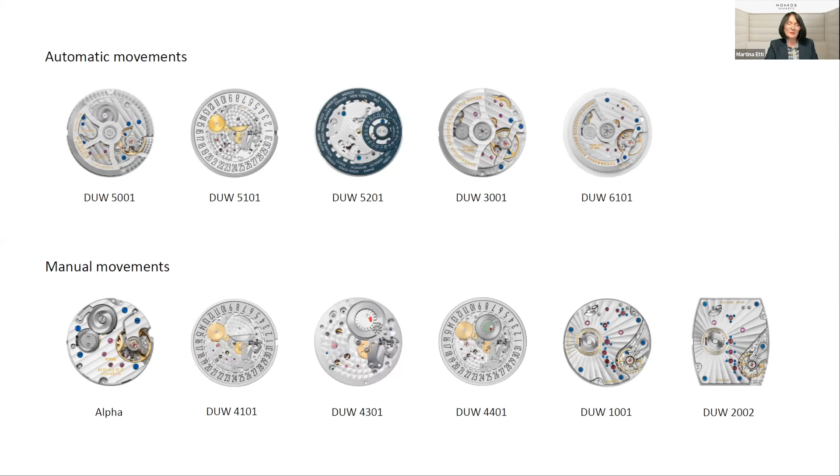Yeah, considering that contemporary luxury watchmaking in Glashütte could only start after the fall of the Berlin Wall in 1990, the row of 11 in-house calibers, as you see them here, makes us a bit proud. It all began with the lineup of 4 models, simplistic and elegant, with a classic hand-wound movement. By the way, the very first watches that came into the market from Glashütte after the German reunification.

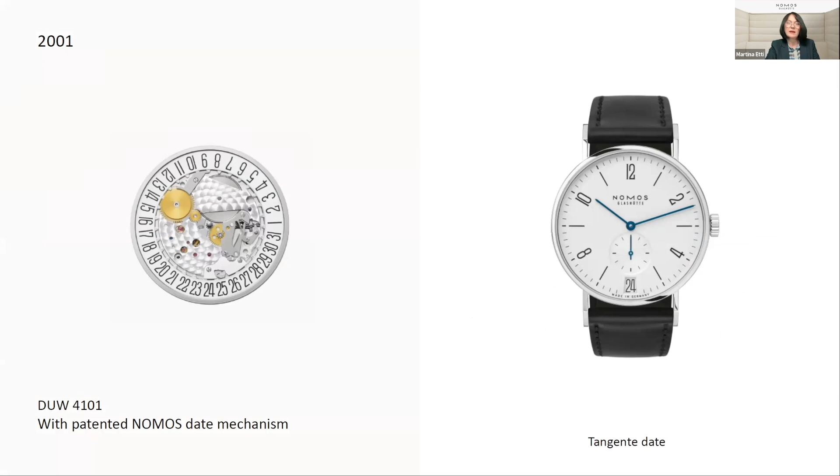For many years, everything the watches earned was invested in the step-by-step development of a full in-house movement. This is why in 2001, the first Nomos watches with date could be equipped with an in-house developed patented date mechanism, constructed in a way that kept the watch as slim as without date. The same applies for the patented construction of Nomos' very special power reserve indicator, introduced in 2003, constructed directly on the core barrel.

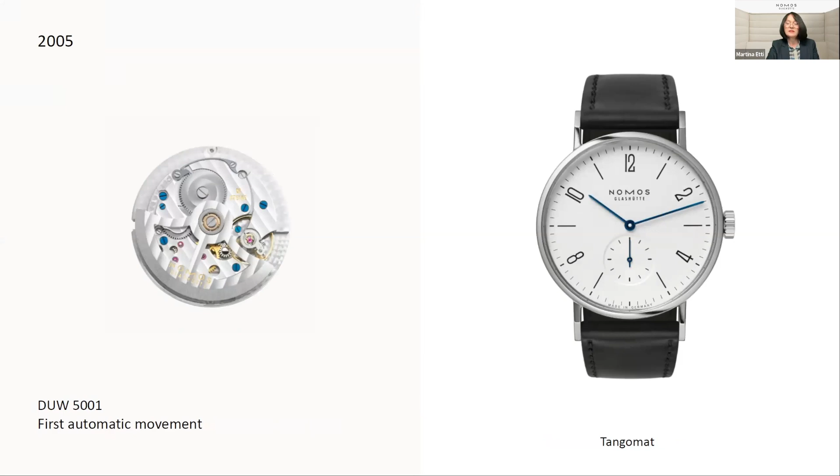The increased know-how over the years enabled the young manufacturer to present its first automatic movement in 2005, and a GMT caliber based on this in 2010. This complication rounded out our collection on the side of larger watches around 40 millimeters, like Zurich on the right side. 4 years later, another milestone for Nomos independence made big waves in the industry.

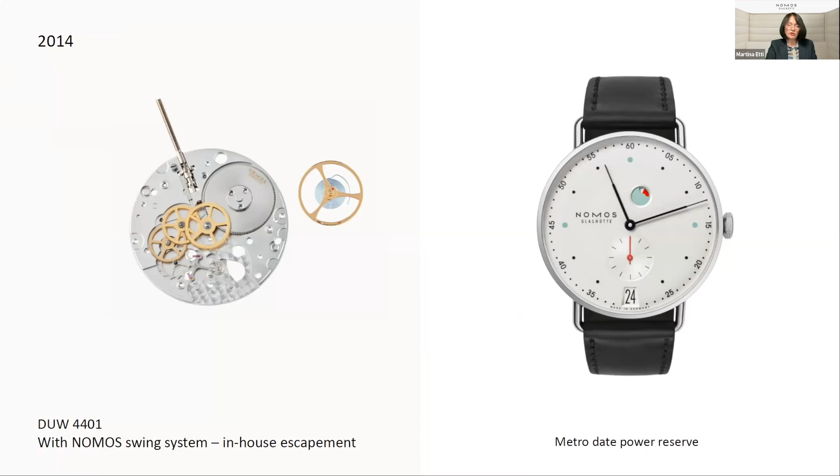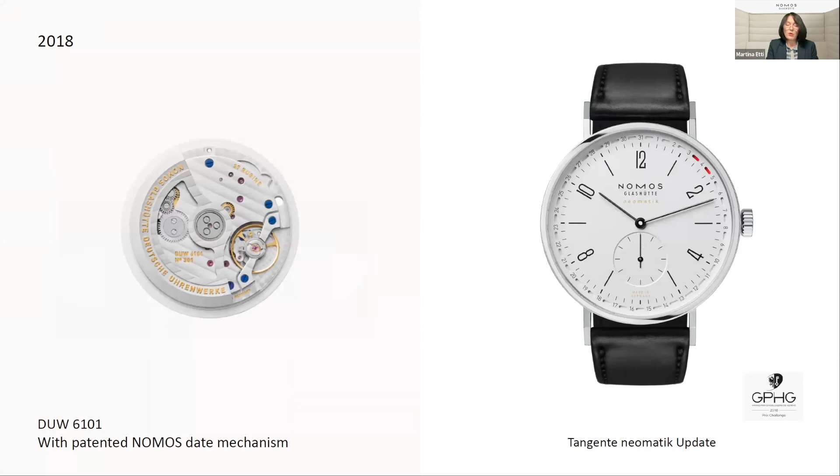The next big goal to develop the Nomos collection further was a slim automatic movement to equip our elegant hand-wound models with a self-winding motor. These slim automatic movements came with their own category, Neomatic, and my colleague Theodor will now report much more competently on these last 2 developments. Theo? Thank you, Martina. Thank you, Nick.

Today, I would like to show you the latest developments of Nomos Glashütte. And let's start with the screen sharing. Okay. I'm going to talk about our latest Neomatic movements, DUW 3001 and DUW 6101. 2 movements of the next generation. How was it possible that they could be so thin? We will talk about the 2 major designs.

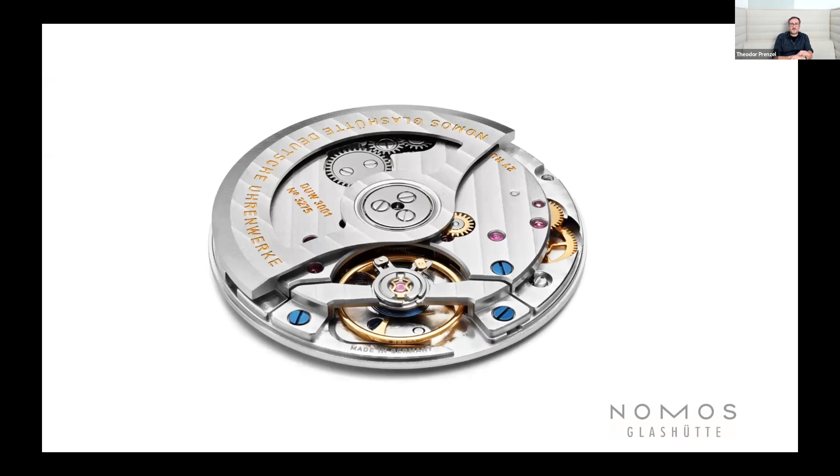Namely, DUW 3001, an automatic movement with automatic winding and the possibility of hand winding, of course. Just have a look at this. I think a quite beautiful movement and a typical Glashütte movement, also a typical Nomos movement. But what makes a typical Glashütte or Nomos movement? Basically, the design. Instead of two bridges, the barrel and the gear train bridge, we have what we call the 3/4 plate. 3/4, obviously, because it's not a full plate. It covers 3/4 of the movement, and it makes the movement very, very stable.

Also, we are able to produce the movement in high amounts. So it's very cost efficient, and we don't have to leave the normal price range. So what is so special about it? I can tell you, it's the height, or should I say the thinness. Maybe it's not the thinnest movement in the world, but it's one of them. It has a height of only 3.2 millimeters.

So let's give you a few key facts. Let's start with the name, DUW 3001. DUW standing for German Watch Manufacturer, in German, Deutsche Uhrenwerke. This is the label under which Nomos produces and of course sells and uses the movements. We have a diameter of 28.8 millimeters, and these are 12 3/4 Parisian lines. We have 27 jewels, and all in all 157 parts.

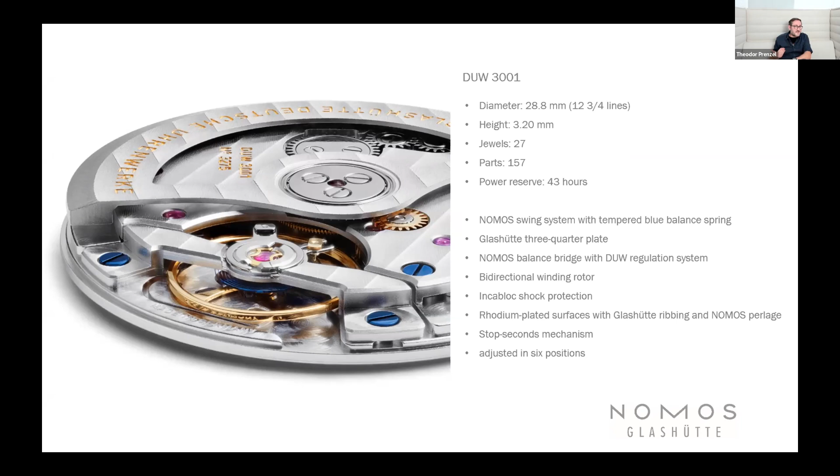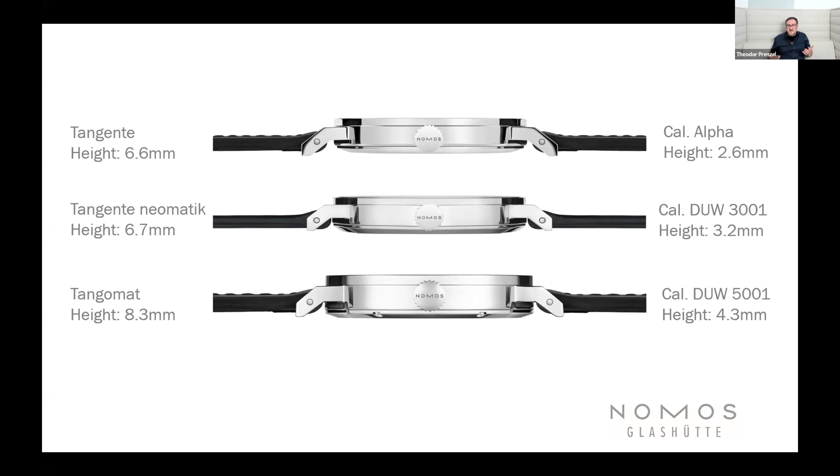This is the new Tangente Neomatik 3001, and you can see how thin it is. It's an automatic watch. It's a bidirectional winding watch with a height of 6.7 millimeters. So there's just the difference between the hand winding case to the automatic case of only 0.1 millimeter. That's really nothing. So the question is, how was this possible?

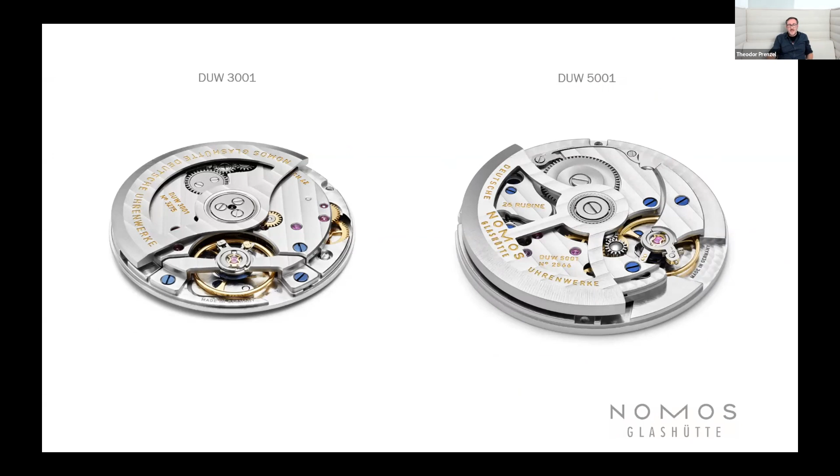The first design principle is the layout of the movement. At the left-hand side here, we have the 3001 movement, the new, the thin movement, the latest development. And on the right side, there is DUW 5001, as shown before in model Tangomat. It's a classical movement. At the first view, they look the same, but the differences are in the detail. So what we will do next, we will assemble both movements to see the different design layouts.

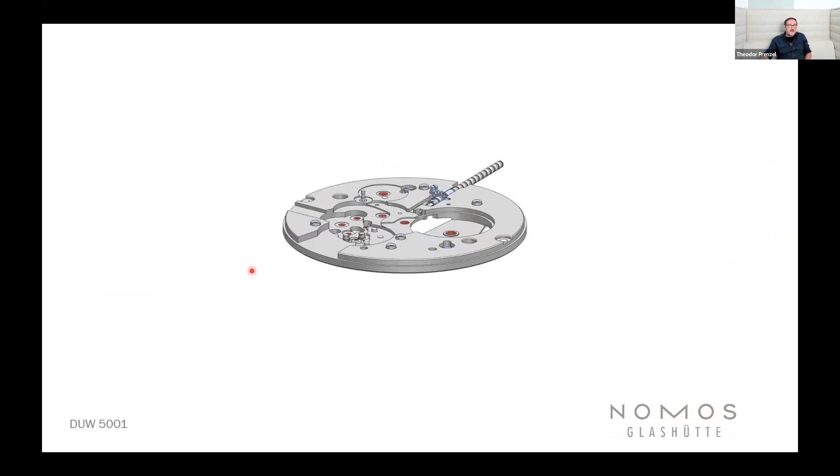Let's start with the classically built movement DUW 5001. Here we have the base plate, the main plate, and the stem here is already mounted, and there's no drivetrain, nothing, just a few jewels. In the next step, we are mounting the gear train here with the barrel, the gear train, the escape wheel, and the second stop lever, and after that our famous Glashütte 3/4 plate. And then we have the hand winding mechanism, which also needs to be included.

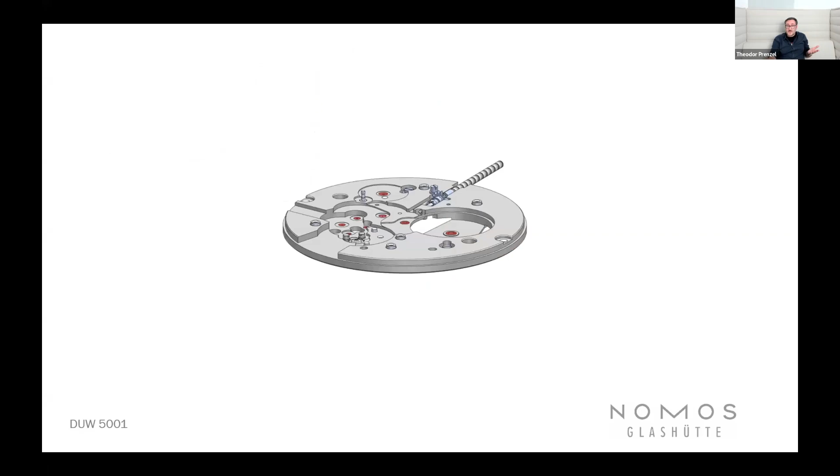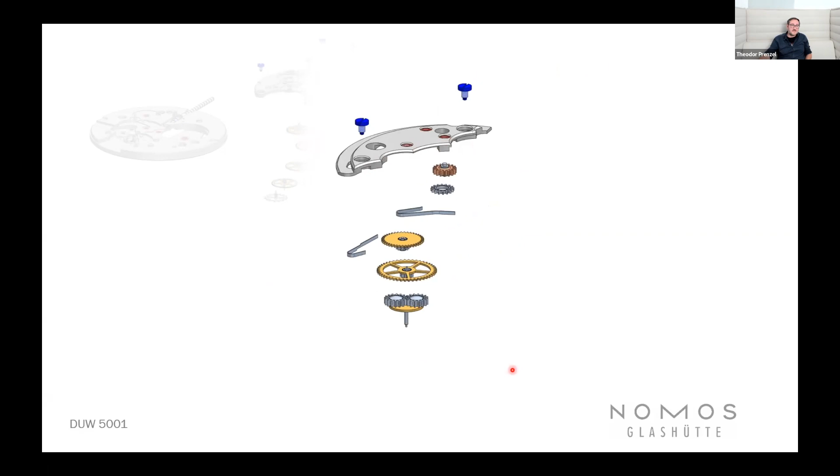Okay, so remember, we have the main plate, we have the gear train with the 3/4 plate, and we have the hand winding mechanism. And after that, we can now have basically the automatic winding mechanism to wind up the watch in an automatic way. And last but not least, we have the rotor, the weight which produces the energy for the mainspring inside of the barrel. Okay.

Here we can see all the parts in one slide. And this all has to be stacked on top of each other. And of course, this consumes a lot of height. It's a classical sandwich movement. Maybe you might be asking, why is Theo so crazy about the height, or Nomos, or the whole watch industry? Well, traditionally, the craftsmanship of a watchmaker is shown in miniaturization, making things smaller. For us, a thin watch is an elegant watch.

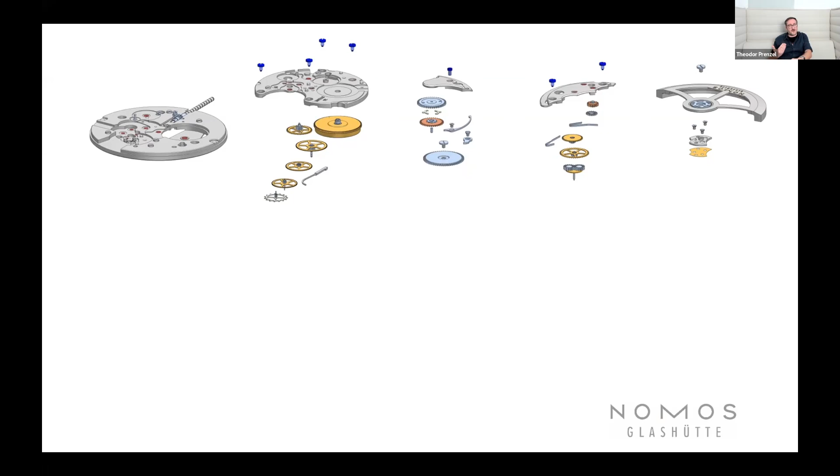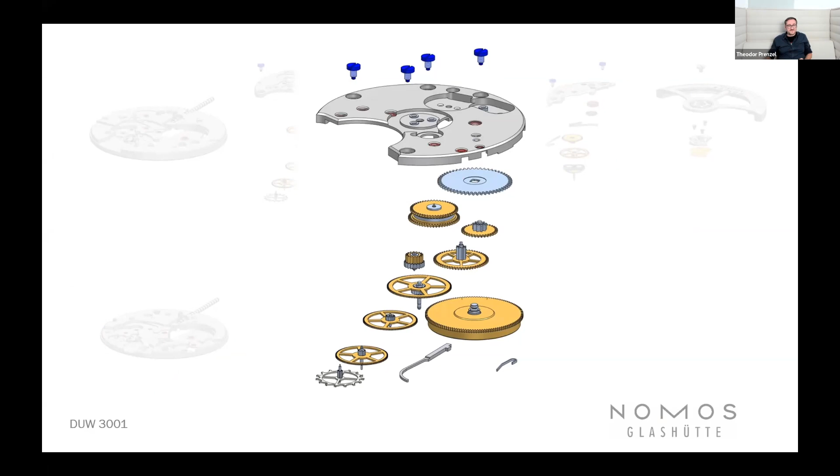And now let's have a look at the new movement DUW 3001. Again, in the first step, we have our main plate with the winding stem. And then basically we came up with the idea, why not integrate more parts than before between the two plates, between the main plate and the 3/4 plate. And we decided to put the drivetrain and also the automatic train between those two plates. And now only the rotor and some parts of the winding mechanism come on the top. And then we are finished.

This is now the result. We have half the number of sections, not the number of components, not the number of parts, no. We integrated two levels. You can see it here. In the top, we have 4 sections, 1, 2, 3, 4. And here in the bottom, we have only 2 sections, the main plate and the 3/4 plate. Also, we nearly halved the part tolerances and tested lots of different materials.

The ratchet wheel here, for example, which is in the new layout under the 3/4 plate, has to be very, very flat. And through the normal hardening process, such a thin part normally gets bent due to stress inside of the material. So we did lots of research, and now we use a special steel alloy with which the bending is within our small tolerances. So we halved the number of sections that had to be stacked on top of each other, and the result is a super slim movement that demonstrates the craftsmanship and allows for very, very thin watch cases.

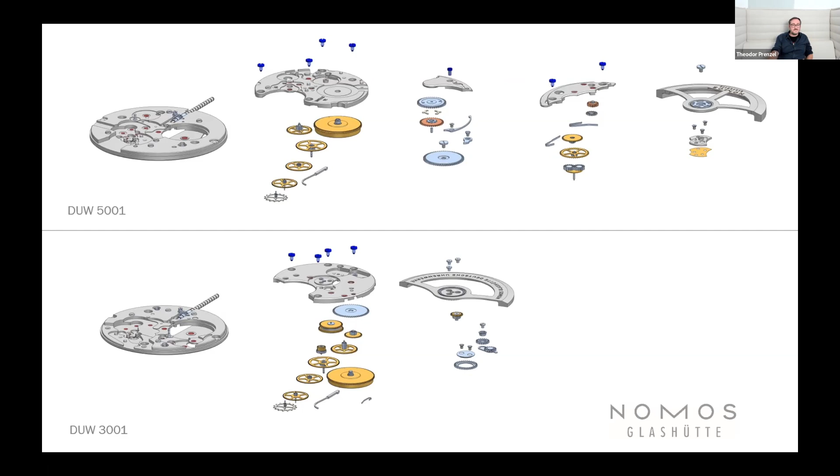Both movements, the 3001 and the 5001, are bidirectional winding. So no matter in which direction the rotor revolves, clockwise or counterclockwise, it doesn't matter. It produces energy in both directions. However, the mainspring inside of the barrel can wind up only in one direction. So a system is needed which converts this bidirectional winding into a monodirectional one.

In the 5001 movement, we used a so-called sliding gear assembly. Here on the top, you can see there are two wheels mounted. And depending on the direction of the rotor rotation, one of two wheels are meshed, and all of the wheels of the automatic train revolve in just one direction, and so does the winding of the mainspring.

In the 3001 movement, we had a completely different system. We used the so-called twin pawl winding wheel. We have two sections here, two gears, and in both sections there's a blocking mechanism. So this system is not an invention of Nomos.

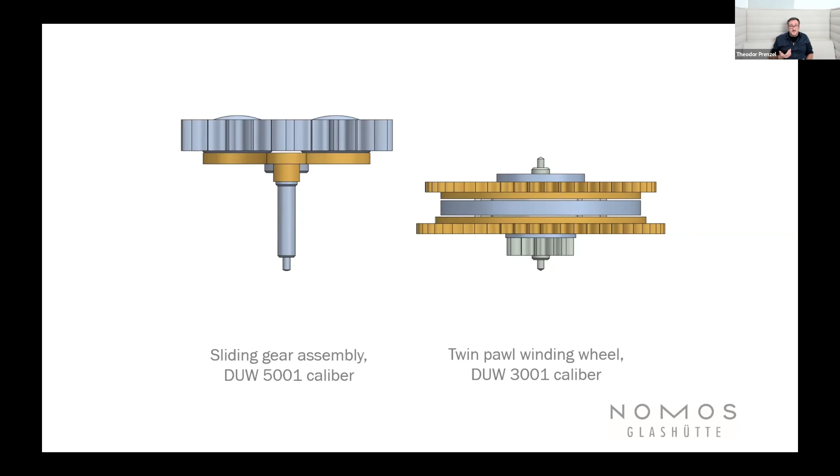Other brands use the system too, but for Nomos it's new that we produce and assemble nearly all parts of this twin pawl winding wheel by ourselves. The whole assembly consists of 12 single parts, and it's very difficult to mount because of the small part sizes. And the height of this complete system is just about 2 millimeters.

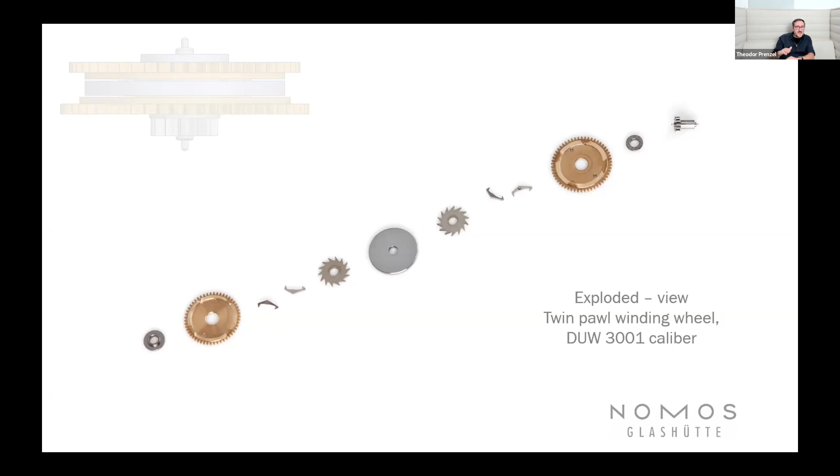Let's have a short summary. We talked a lot about the minimization of the height to make a watch thin. I hope I have been able to show how we put most parts between our main and 3/4 plate. Another big achievement is not about the size of the watch, but about the performance of the movement, the automatic winding mechanism. This system converts the motion of the arm, the motion of the watch, to energy, which is stored directly inside of the barrel mainspring.

So there are two things we keep in mind. The first one is, how big is the power reserve? How many hours can the watch run if it's not worn? And second, how often do we have to move our hand, and how quickly can the maximum power reserve be achieved?

Maybe you know this situation. People sit concentrated at their desk all day long without lots of motion. Often they wonder why the watch has stopped on their way home. Simple reason, there was not enough motion. The power reserve gets empty and the watch stops. And now let's walk through the chart here.

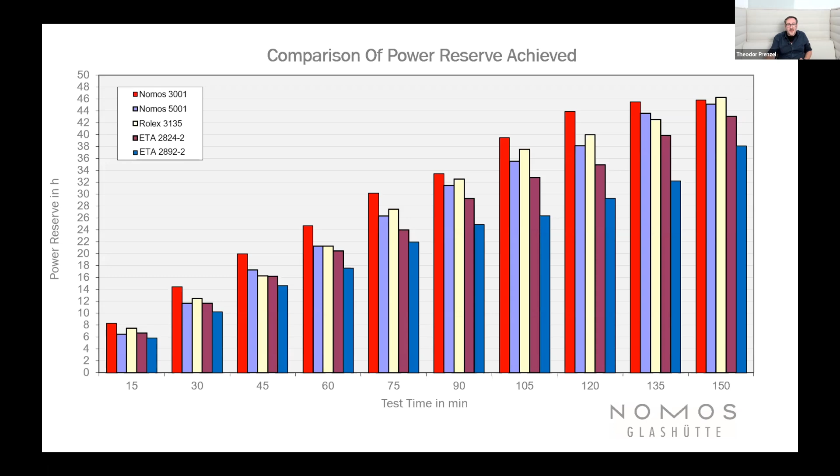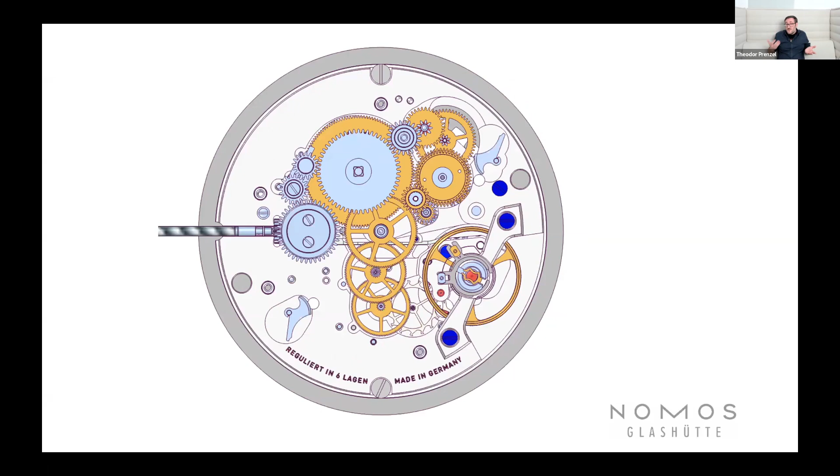The next step is the second biggest innovation. Our latest movement, DUW 6101, a movement with a date indication. If we remove the rotor and the 3/4 plate, we can look into the movement. And here in this CAD picture, you can see it too. Nearly all parts are mounted again between the main plate and the 3/4 plate. So it's a movement of the newest generation too.

I already said it's a date movement. And of course, I think the most impressive part is the date disk. It carries the numbers from 1 to 31; every day of a month has its own number. And in the movement, we have here a section for the quickset function. And on the left side here, there's the section for the date change during midnight. But before that, I'll give you some key facts of the movement.

We have a diameter of 32 millimeters of the main plate. But what you can see, the date disk here from the other side is much wider than the main plate. So if we include the date ring, we have a diameter of 35.2 millimeters, and these are 15.5 Parisian lines. The height with 3.6 millimeters is again this very, very thin movement.

We have again 27 jewels and all in all 188 parts. The power reserve is about 42 hours, 1 hour shorter than the 3001 because the date function needs some more energy. So the power reserve is 42 hours.

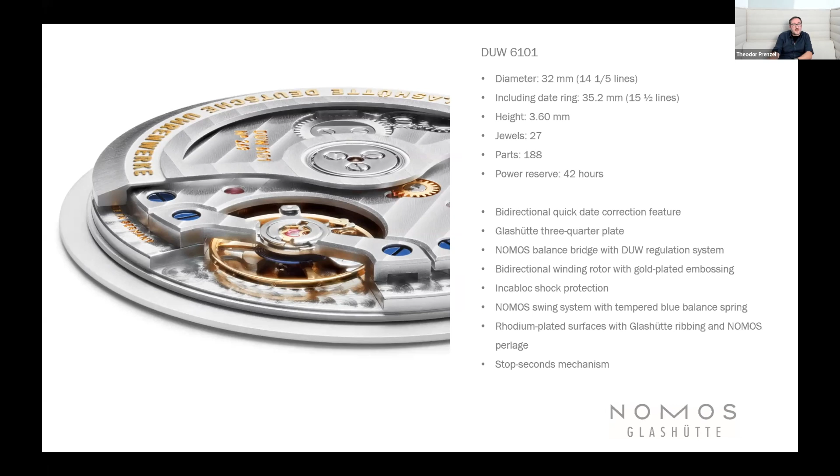The correction of the date function, and this is very unique for this movement, is bidirectional. That means if I pull out the crown to the first position, the quickset position, I can change the date in 2 directions. I can change the date clockwise or counterclockwise, depending on the rotation of the crown. And so it's very easy and very quick to change the date to the date you want to set.

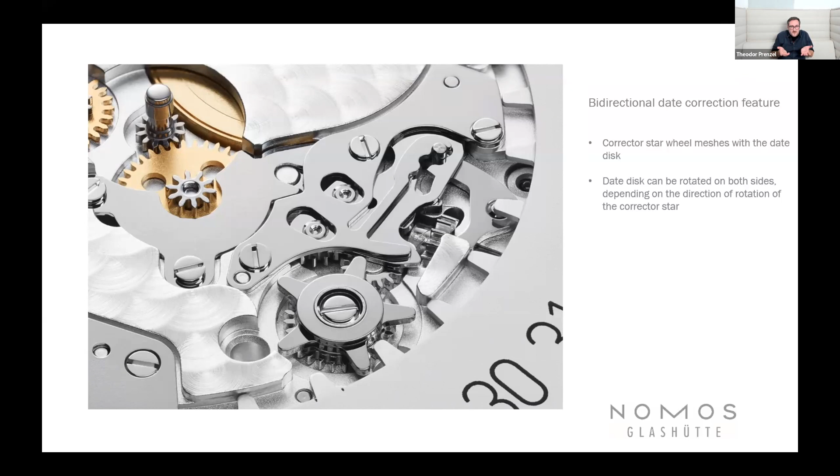And how is this working? If you pull out the crown, the wheel here with this 5-arm star is engaged with the crown. And depending on the direction of the rotation of the crown, this wheel also rotates clockwise or counterclockwise. And of course, the date disk rotates in both directions. Okay, and so you can see it's very easy and very quick to change the date.

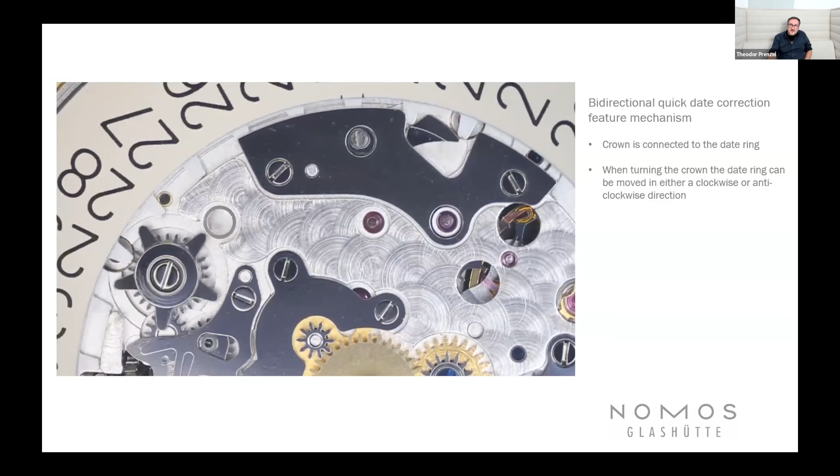The second interesting point, or the second section of the movement, is the function when the movement changes the date during midnight. This picture is not the 6101 movement. It's a picture of our DUW 4101. It's a hand winding movement, which is built in the classical traditional way.

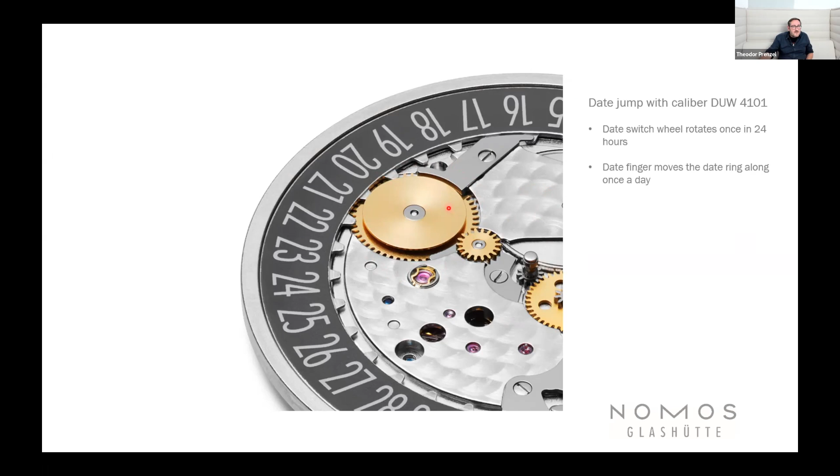But you can see the normal used system here. Most watches with a date indication use this system. So it's the most famous principle of changing the date during midnight. If we remove this cover here, we can look into the wheel. And what you can see here, there's a very big spring, a rounded spring. And this whole wheel, also with this spring, rotates one time in 24 hours.

And during midnight, here, this little finger gets in contact with a tooth of the date disk, and then the spring is tensioned. And after a certain torque, the spring releases and the date will change to the next date. Because this is the most famous principle, it's a very good system.

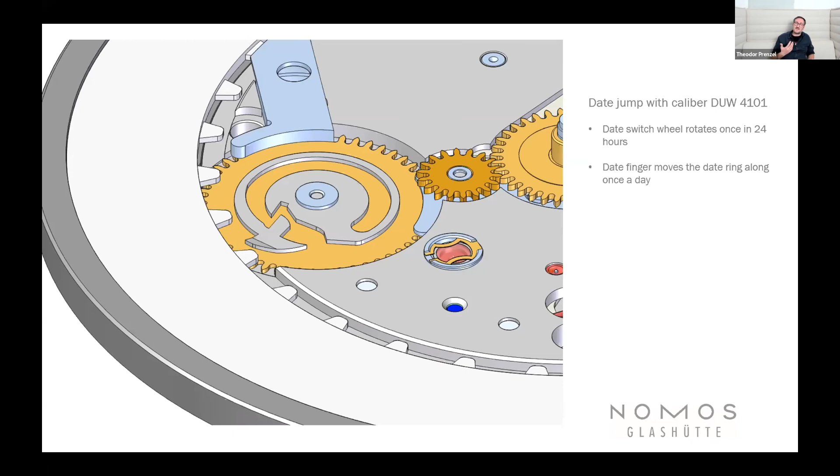But it's a very big system. You need lots of space to use the system. And if you want to build a flat or thin movement, you don't have space. No space. And so we had to invent a completely different system for the midnight date change.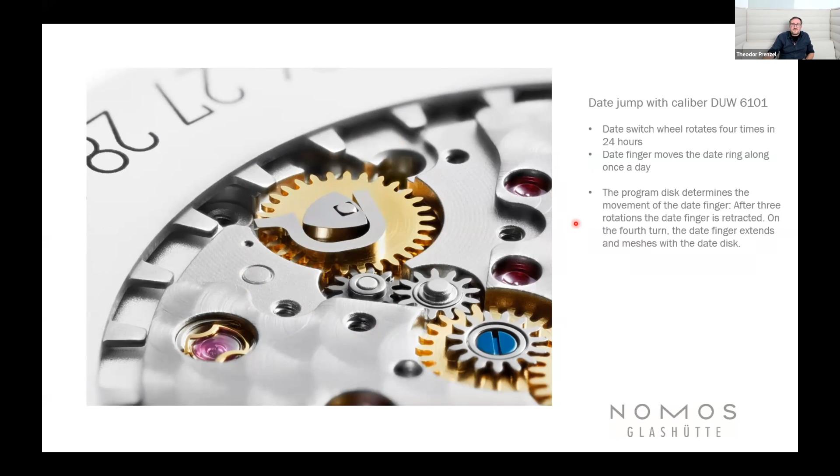This picture shows this completely different system. Here in the middle, we have our program disk. In the technical view, it's a cam. And on the other side here, we have this finger, I can say. And if we go to the next slide, it's better to see here.

Under this cam and under this finger, there are two wheels. The wheel in the top rotates 4 times per 24 hours. The wheel in the bottom rotates 5 times in 24 hours. But of course, the date will not change 4 or 5 times a day. That makes no sense, of course. And now there's a trick.

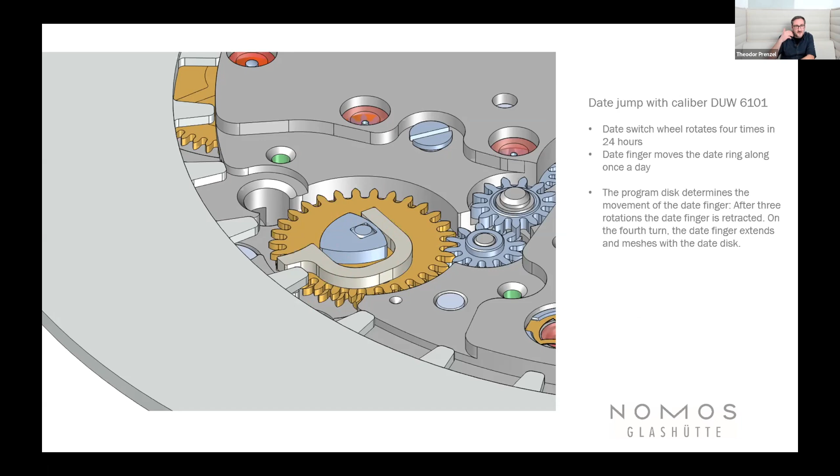The cam is connected to the wheel in the bottom, and the finger is connected to the wheel in the top. And so the cam rotates faster than the finger, and so the cam can control the finger. The cam can pull the finger out to change the date and pull it after that again back to the middle. It's very difficult to explain this function, so let's show a video.

Here you can see the system in action. In the middle here is this cam, and you can see it rotates faster than this finger. Also you can see both wheels. And now the wheel lifts off the finger, it gets in contact with the date disk and changes the date. And after that, the finger gets again back to the middle of the wheel. Let's see it again.

You can see the first time the finger passes the tooth, nothing happens. Also, the second time, the finger doesn't get in contact with the tooth. The third time, too. And now the finger is lifted off again, meshed with a tooth of the date disk and changes the date.

Because the whole system rotates much faster, it rotates 4 or 5 times a day, the speed for the change of the date during midnight is much faster than the classical system, where the date wheel rotates only 1 time per 24 hours. So that means our movement needs nearly 30 minutes to change the date.

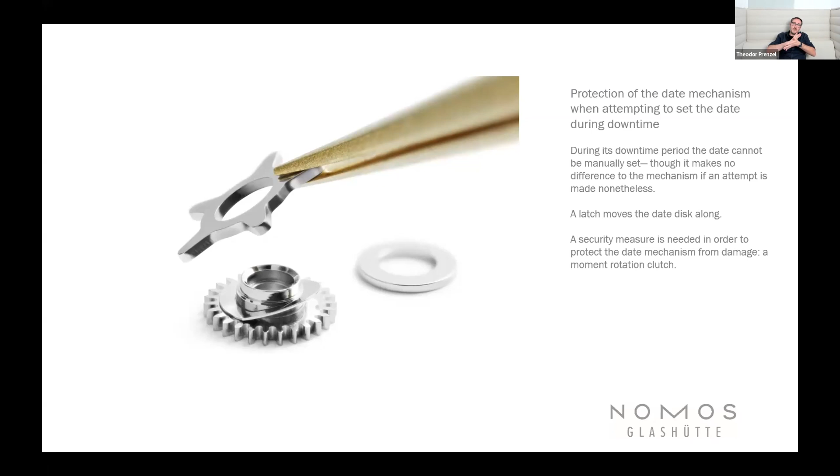Again, you can see it here, this 5 arm star. And here in the bottom, we have a wheel, and both parts are connected with the spring. So in technical speech, we have a clutch. Both sections are pressed together and rotate together. And if the torque gets too high, the clutch releases and both sections can rotate apart. And so this works.

In this movie, it's during midnight. Normally, the movement would change the date because the finger is meshing with the date disk. And if you pull out the crown and try to correct the date, you can see it here. The wheel in the bottom rotates, but the 5 arm star on the top doesn't rotate, or just a little bit. And so it's not possible. You can try to change the date during midnight, but it's not possible.

And the main idea was that lots of different watch brands have different times for their downtime. Some brands say you should not correct the date from 10 o'clock in the evening to 2 o'clock in the morning, or 9 o'clock in the evening to 3 o'clock in the morning. And it's too complicated, especially for people who own more than one watch. You don't have these numbers in your mind.

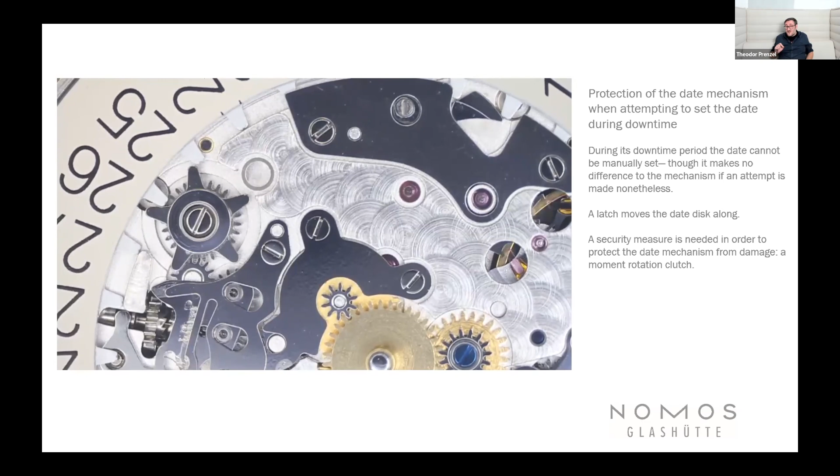And for us, it was very important to invent a system where you don't have to think about it. You can try to change the date during midnight, but you damage nothing. You harm nothing inside of the movement, and you avoid maybe a very costly repair of the movement. Okay. And this, the beauty, the DUW 6101 again.

Before I ask you for your questions, let me summarize the main ideas of this presentation. First of all, I have tried to give you an overview of our latest developments, the DUW Deutsche Uhrenwerke 3001 and 6101. The first one has no date, the second one has. The 3001 boasts a height of 3.2 millimeters, and the date-featuring 6101 has 3.6 millimeters. Both calibers are really outstanding and make Nomos watches stand out due to their revolutionary, high-end movements.